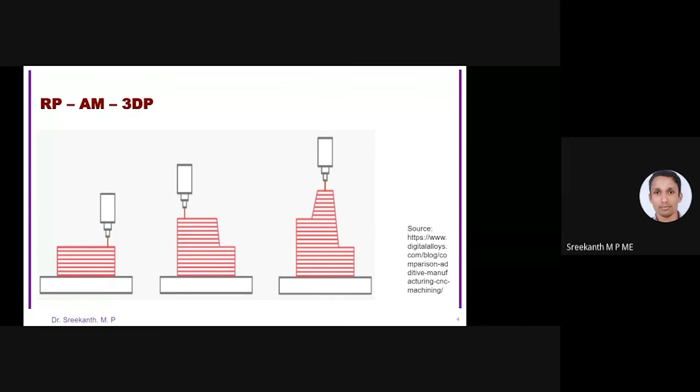This is the basic idea of additive manufacturing. You are depositing a layer of material over a table, then adding another layer over the other. You can make a prototype, or nowadays even a final end-use product. This is a way of manufacturing the product layer by layer. The layer thickness may vary depending on which technology or machine you are using.

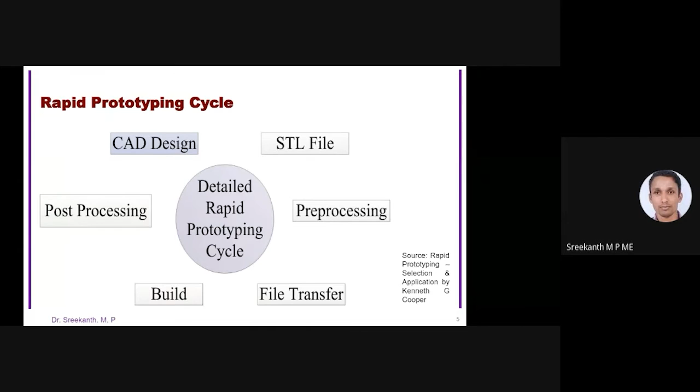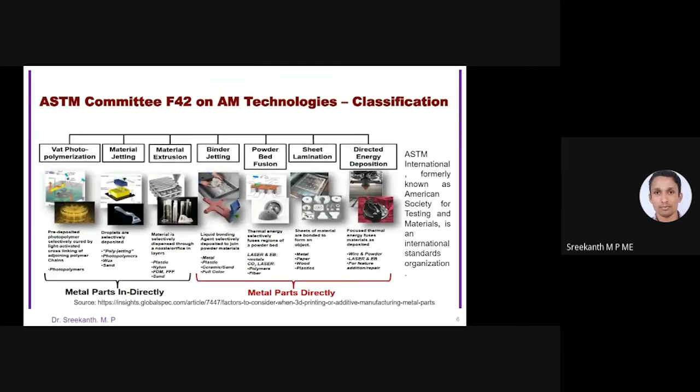I actually worked with FDM, fused deposition modeling, as well as polyjet technology. FDM, fused deposition modeling, is a solid-based technology.

The material in its initial form is in a wire form, and that wire will come through a nozzle into a heated chamber. At that time this material will become semi-solid, like our toothpaste for example. If you press at the back end, it will paste wherever we are projecting or directing it. So it is similar to that.

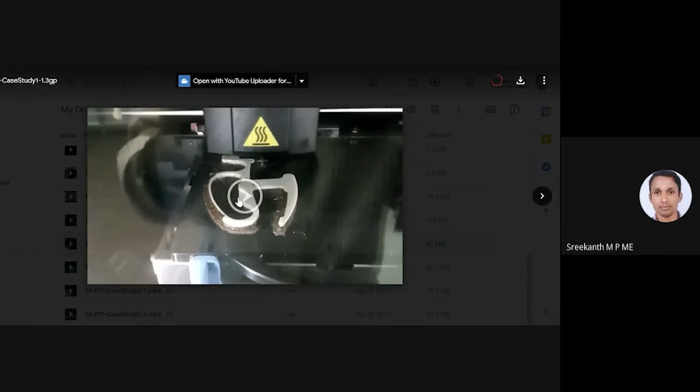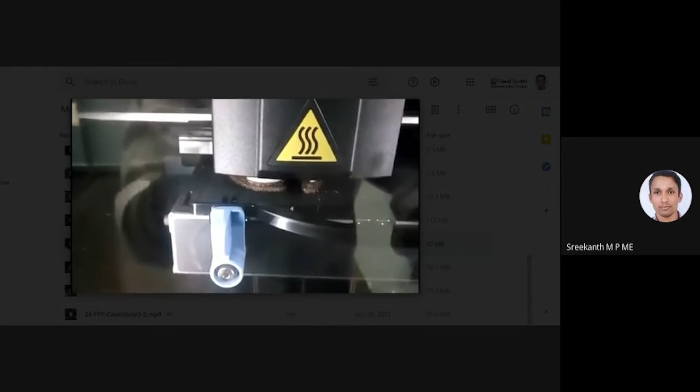So this is the table, and this is the nozzle, and the material will come from the bottom to the top. You can see this is the support material. This is actually ABS material, acrylonitrile butadiene styrene, and the support material is the same material but in a different composition - a chemically soluble material.

After finishing this operation, you take it out and deposit it in hot water around 75 degrees Celsius, with some chemical that will be supplied by Stratasys itself. You put this material into that, and this brown color support material will be dissolved in it. It's soluble, so it gets removed by dissolving.

There are also other support structures called breakaway support structures, which you have to remove using hammers or maybe a knife. So at that time, if you are careless, this process will actually damage the model material itself. There is a possibility for that.

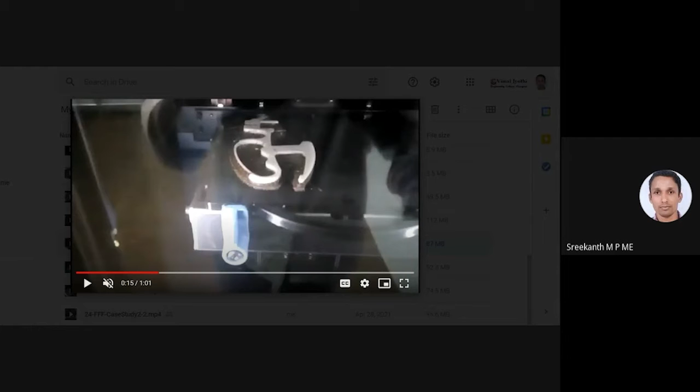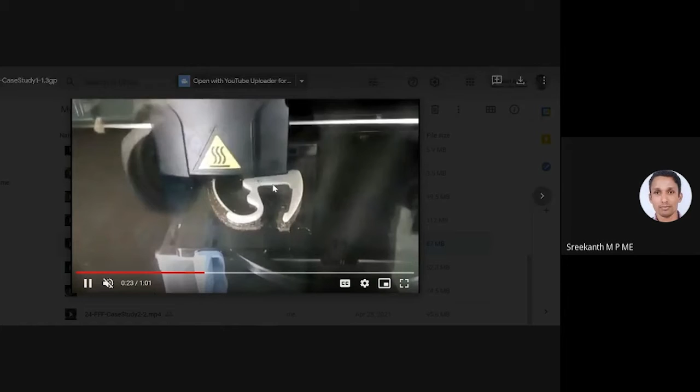That's why they invented this type of chemically soluble or hot water soluble support structures. So that is cleaning the nozzle tip, and after that it will deposit the material again.

You can see here, this part is actually not - there is a slight gap here. So that is not started till now.

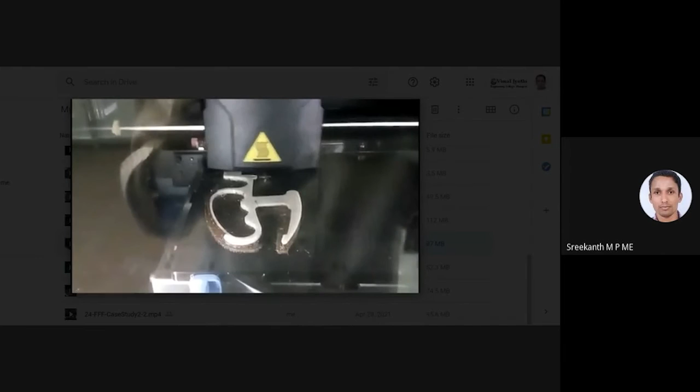In this way, this operation will be done by the machine - meaning the machine will choose where it has to deposit the material first. That depends on how that process is actually happening.

I already told you about pre-processing, right? Pre-processing will be something like this. So normally in the software, you can choose that.

So this will be the build volume. Normally this is called the build volume, and it depends on the machine. The build volume will depend on the machine - it may be 250 by 250 by 120 or something like that.

So if your model is big, you have to scale it down and fit it in between. If the material is beyond this size, obviously you can't print that, so you have to make a scaled version.

So this is what normally happens in the pre-processing stage, and obviously it will depend on the software you are using, but similar operations will be there.

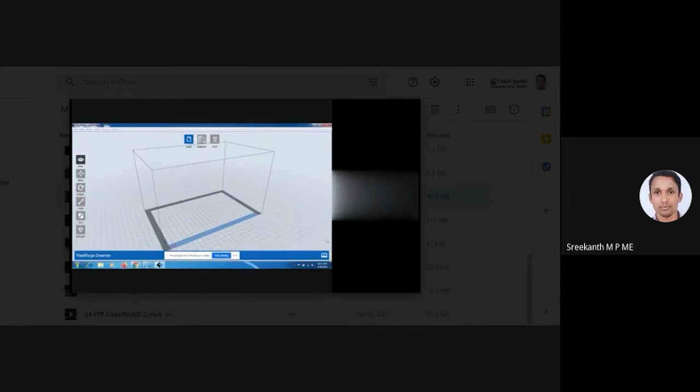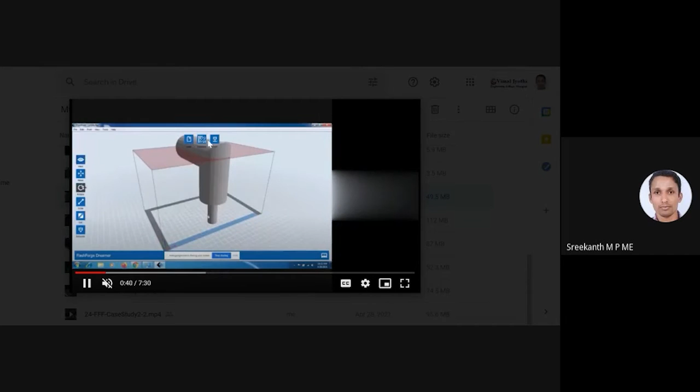You can bring the STL file from your computer. The reason it shows that error message is because it's bigger than the build volume - beyond the build volume for that particular machine. That's why it shows an error message.

So you can set the position as well - this is called orienting. In any way you can orient the product.

If you orient it this way, one main problem is the staircasing effect. If it's a cylindrical object, a staircasing effect will appear, so you have to reduce it as much as possible - meaning the edge will not be very smooth. If you're concentrating on a smooth object or extreme surface finish, it's better to use another orientation to avoid that staircasing effect.

Another point is the size of the object - the height. If you orient it this way, just think the height is till this point. At that time, another problem for FDM and similar additive manufacturing machines is reduced strength in the Z direction. That can also be reduced by orienting it differently.

But you have to create your objectives - meaning whether you need only a surface, just to show how the object will look like.

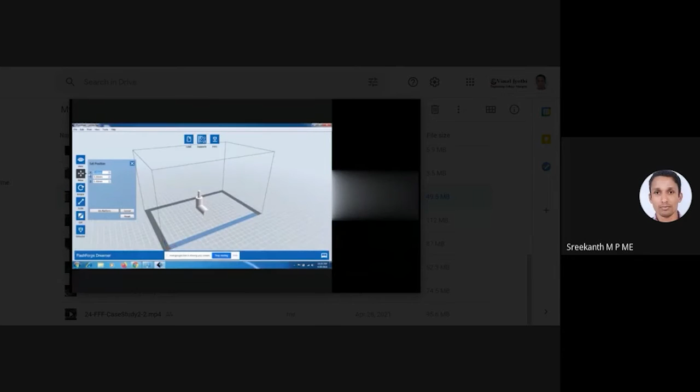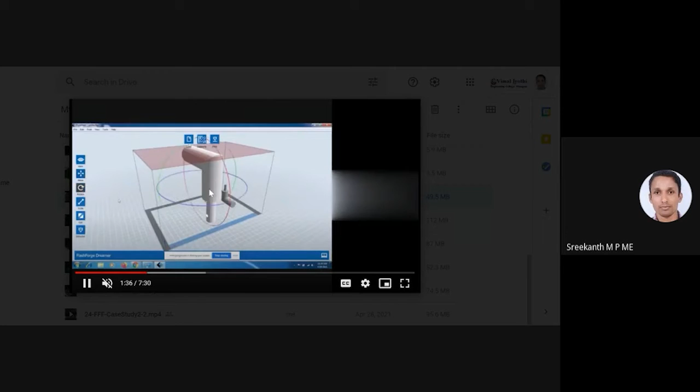So you can position it. This is actually scale down - you reduce the size of the object, then you position that in the extreme right position of the table. Then you can bring the other objects. If you just need to make the prototype, and you need say 4 objects to be printed in this particular run, you can bring all 4 objects and scale them down just to see how it looks like.

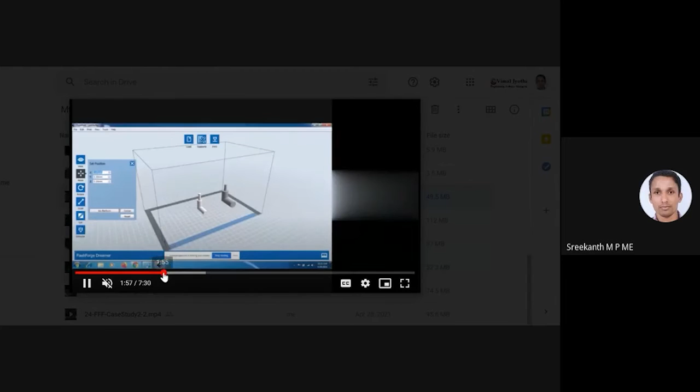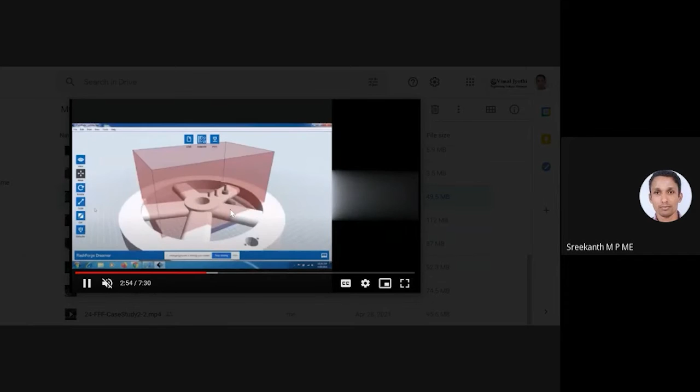You can position it accordingly, then start the process. So all these 3 objects came there. Now we have a wheel, a hand wheel, which is very big size, so we again reduce that and bring it there. You can position it accordingly. So scaling, orientation, positioning, everything can be done in the software itself - this will be the position.

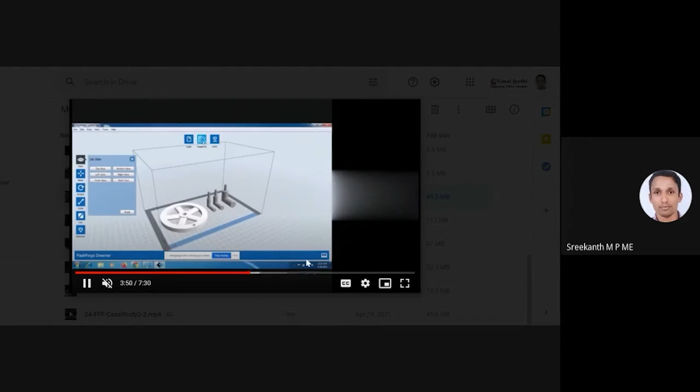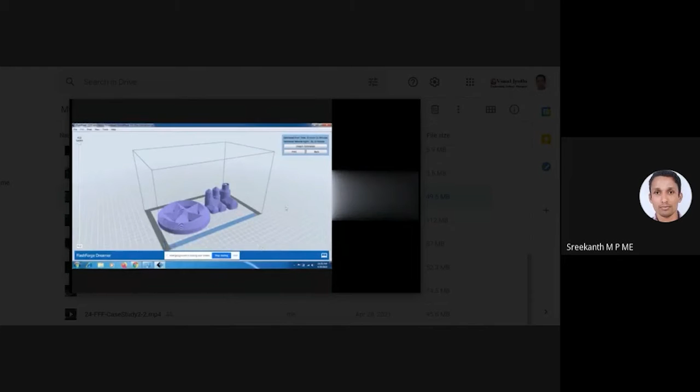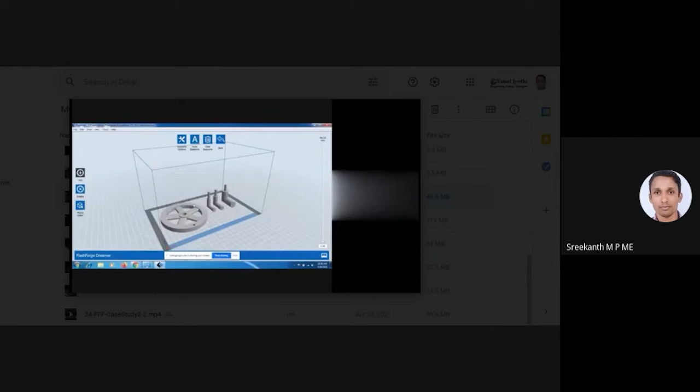After completing all these operations, you can go for printing. It will create the support structure also - you can generate the support structures. Normally every 3D printing or additive manufacturing machine will lay 5 to 10 layers, depending on the machine or technology, of support material below the object. When you remove the products from the table using a knife or chisel type object, it shouldn't damage our product. So we deposit around 5 to 10 layers, sometimes more, of support structures below the object, so that you can remove it easily without damaging your product.

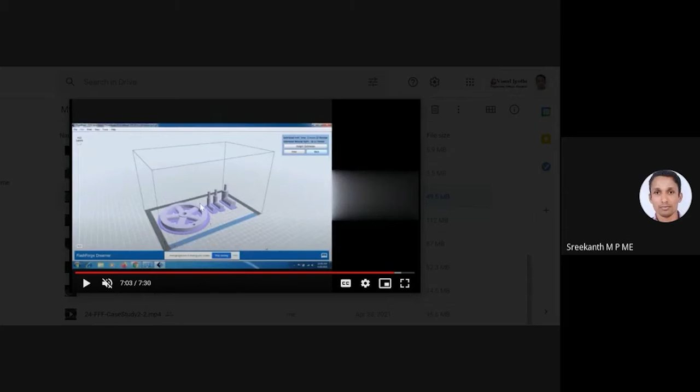This is the way we normally create the support structures, as well as handle the positioning and orientation of objects. You can see these are the actual support structures we generated, below the object. Because there are no much extended surfaces or extended parts in this object, only the bottom support structures are enough to complete this particular product. This is the way we normally do that.

Hope you have a small idea about how it is actually working in this software. Obviously with changes in machine as well as software, slight variations will be there in the operation, but normally we do this orientation, generating support structures, scaling, positioning, etc. in a similar fashion, in a similar manner. So that is about this FDM or FFF.

Why I call this FFF is because FDM is the term for fused deposition modeling - this term is actually used by Stratasys. Other manufacturers use FFF, which is called fused filament fabrication. The technology is the same, there is no difference, but Stratasys patented this word, so others use FFF, fused filament fabrication.

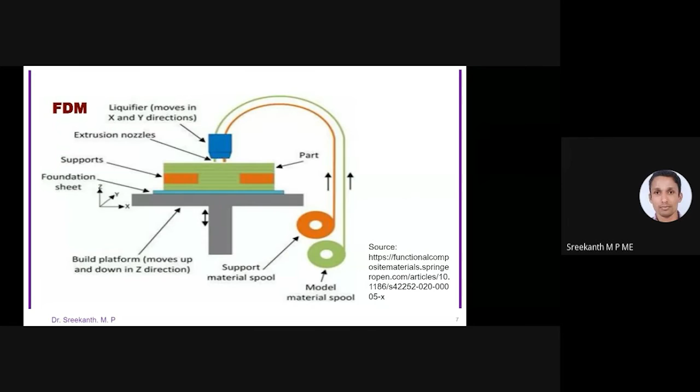So now another machine I worked with is the polyjet process, polyjet technology. This is actually a material jetting process. You can see that this is a nozzle.

Okay, from this, can you see this cursor? Can you please tell me? So whatever I am showing here, is the cursor visible?

Yes, okay, thank you. So because I can point at it easily.

So this is actually that nozzle. Normally that liquid material will be in a container, both support as well as model material. I worked with an Objet 260 Connex machine. There will be two compartments for materials: two model materials as well as two support materials can be inserted together in that particular machine. We can insert two different materials for the model, meaning the model material can be two different materials together.

This is an Objet 260 Connex, also a Stratasys product. They say that if you mix these two materials, there are different patented materials: Vero White, Vero Blue, Tango Plus, Tango Black, etc. This is Tango Plus. The Tango family is a rubber-like material, and the Vero family is a rigid material.

You can insert Vero White as well as Tango Plus together at the same time into your machine, and print by mixing these two materials, say 60% Vero White and 40% Tango Plus. That is possible in PolyJet, in the Objet 260 Connex series of machines. The specialty is you can change this composition, maybe 60-40 or 70-30, etc., so the rigidity and flexibility will be according to your selection.

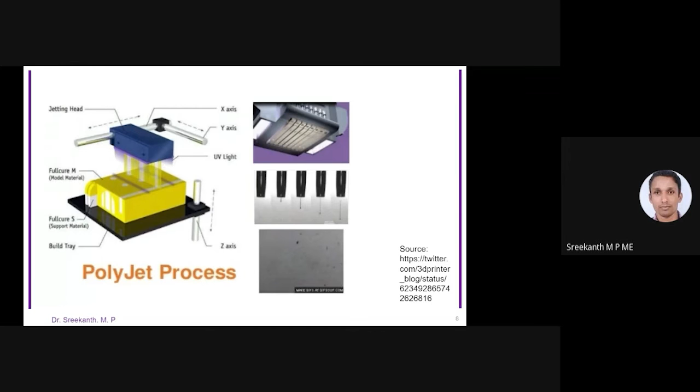That was possible in this type of machine, but in FDM, which is what I worked with, that is not possible. So you can see some of the application areas of additive manufacturing in the construction field.

This is in Dubai and this is in China, and for medical applications like cranioplasty as well as lower jaw implantation. This is actually made by GE, General Electric, for one of their aeronautical engines. And this is a bionic eye, which is still under development, not fully developed, it is under process.

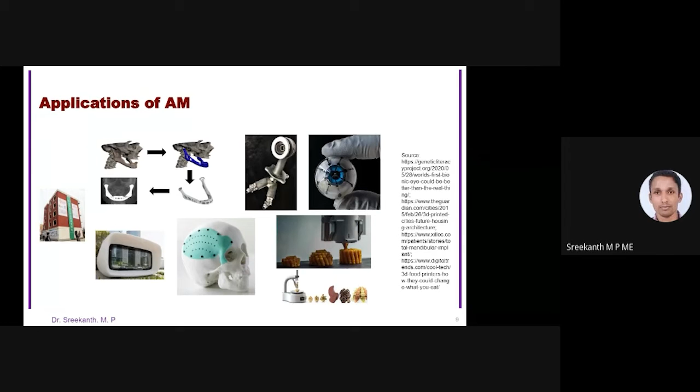And in the food industry, you can print customized chocolates as well as cakes using this, meaning instead of normal plastic material like Vero White, Vero Blue, or ABS, you use a food material, a cake or chocolate material, and paste it through this. The specialty is, by using CAD data, you can make a customized cake or chocolate for one particular person. That was the idea behind it.

The main advantages are: it's a fast process because it reduces time to market. During the design process, starting from recognition of need to the marketing stage, you can incorporate this prototyping stage at different points, creating prototypes in different stages. If you use conventional processes to make prototypes, that will be more time consuming, but comparing to that, additive manufacturing is a fast process.

Another advantage is less wastage of material, because you are adding material, not subtracting anything. In subtractive manufacturing like lathe, milling, shaping, etc., you are removing a lot of material to get your final product.

Here, wastage of material is less, because you are only removing the support material. The model material that you are creating is actually added one layer over the other. The main advantage of additive manufacturing is customization.

Why? Because we know that mass production actually started with the idea of one size fits all product, meaning everybody will use the same product, same size, same shape. But if you want to create a customized product, that's different.

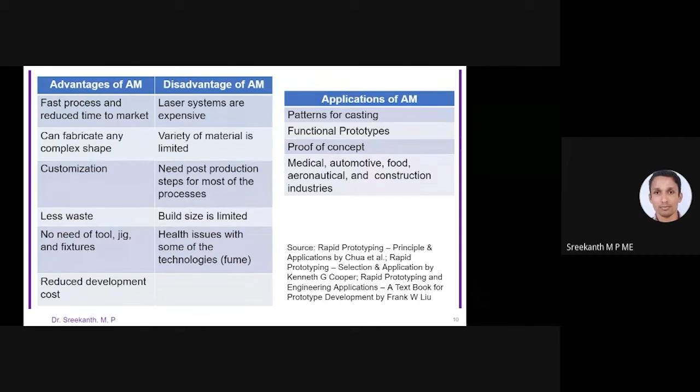That means you can show your design to the management or manufacturing team for further feedback, and you can redesign it.

When considering the additive manufacturing industry as a whole, the Wohlers Report is one of the authentic reports, run by Terry Wohlers. They predict around 7.5% expansion for this industry by 2020, and expect it to grow further. Also, due to the pandemic there were some hindrances.

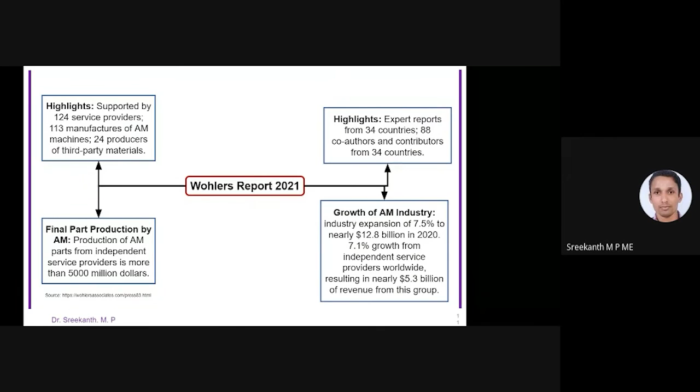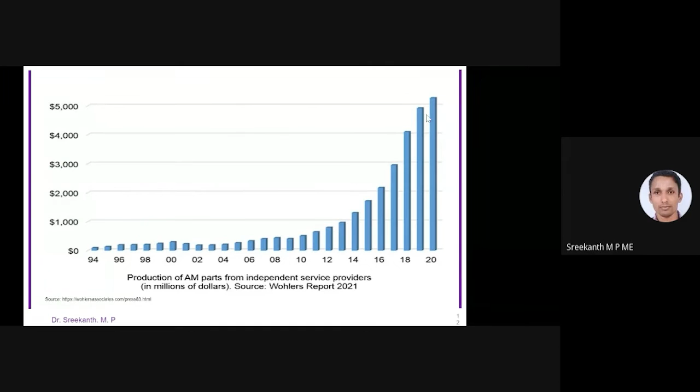Apart from industries like sanitizers, masks, and vaccines, almost every manufacturing industry was badly hit by this pandemic. But additive manufacturing is still increasing, though production and development slightly reduced due to the pandemic. You can see the production of AM parts from 1994 to 2020 continuously increasing, especially after 2012. In 2002 there was a slight decreasing tendency, but after 2012 the growth is tremendous.

So now coming to my case studies, I will present my research experiences.

Before that, you should know what customization and ergonomics mean. I hope you've heard these words. Customization is the action of modifying something to suit a particular individual or task, or maybe a group of individuals. So customization may not be for an individual customer, but sometimes for a group of customers.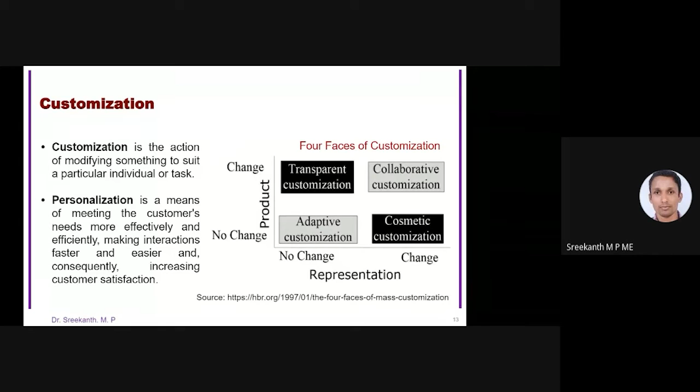This is a very simple example. Personalization is normally individual customization, meaning you are designing for an individual customer, a particular customer, not for a group of customers. There are different types of customization: transparent, collaborative, cosmetic, adaptive. I'm not going much into that, we will come to our research part. Okay, so modularization is there.

When you are going to customize a product, obviously you need to get some data or information from your customer, so that only you can design according to their needs. So these are some of the customer inputs you can collect.

One is functional requirements, how the product should work. If you take the example of a car, you know its main function: it should run and carry passengers. So that type of functional requirement you can collect from customers.

If the customer is a common man, they may not be very interested in functional requirements, but more interested in emotional as well as aesthetic requirements. These are two difficult terms to define, because emotional requirements are very difficult to quantify, and so is aesthetic.

But aesthetic, in some way or other, you can handle, because one customer may think a red color car is a better option, while for another customer it may be a white colored car. Those things can be incorporated, since painting a car red or white isn't a big deal for us. But emotional requirements are very difficult to quantify - that is actually a quality aspect.

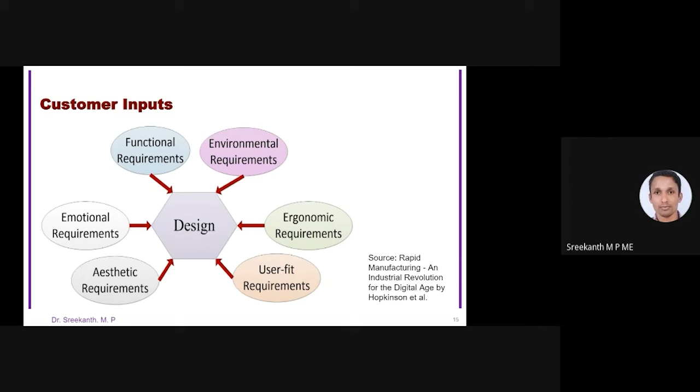So you can do some things ergonomically, and design some objects ergonomically to suit the customer. Next is user fit requirements, which is along with customization. Ergonomics and customization are two sides of a coin, so standalone with customization only, it will not be good. You can merge or combine ergonomic factors with customization factors together and do the design, so that will be better for you.

So you can see here, sitting and working on a computer—these are the ergonomic factors. You have to think about the height, sitting height, as well as the width of the body, etc. You can see this particular handle designed according to the shape of the hand, so it will fit this hand very perfectly, making it easy for him to use that particular product. So this is the basic idea about ergonomics as well as customization.

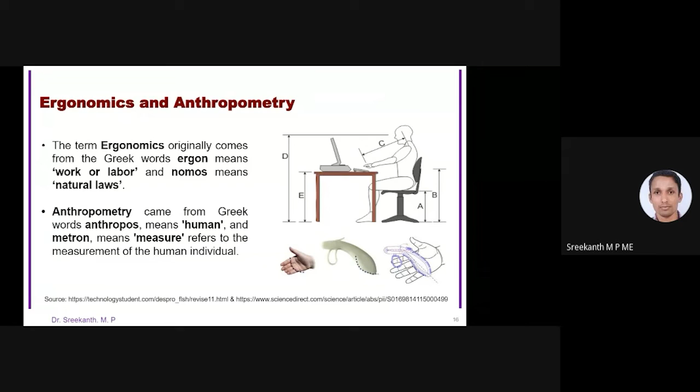My topic, I hope you remember, is user involved product development. So in everything, if it is possible to bring the customer into every stage of your design process, that will be better for you, and you can produce a better product for those customers. So try to involve the customers in your design stage, at every possible stage—that's the idea behind my research.

When I started my research, my guide told me, Sreekanth, our hand size is actually different, right? Did you ever come across this? Think about this—our hand size is very different. Even if you are from the same ethnicity, like South India or North India, or even within Kannur, Kerala, still our hand size and body dimensions are very different.

So collecting these body dimensions is called anthropometry. Anthropometry is related to anthropology, which you may have heard of—that is studying humans, Neanderthal, Homo sapiens, etc. But anthropometry, the 'metry' part, is actually measurement. So this is measuring the body size of a particular customer and designing the product for that customer.

Depending on the product, these body dimensions will be different. If you are designing a handle, you need to collect hand dimensions, not body dimensions like sitting height, etc. But if you're designing a chair, you need to measure the sitting height as well as the width of your body. So depending on the product you are designing, you need to collect the anthropometric dimensions accordingly—based on the product, you have to collect the right dimensions.

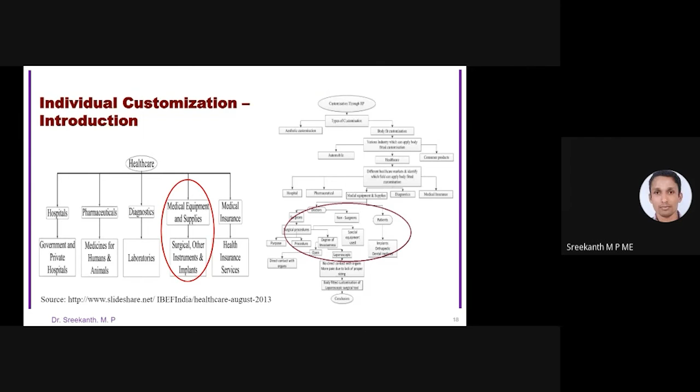And especially in laparoscopic surgery versus open surgery - obviously when you are doing open surgery, you open the body part and touch the organs directly. The surgeons will touch the organs directly, and there is not much problem with that.

But if it is laparoscopic surgery, or minimally invasive surgery, or keyhole surgery, there is a problem - the surgeons are actually inserting tools by creating a small hole in the body, inserting a camera, light, and other tools inside the body, and projecting that surgical area to a monitor. So when the surgeon is moving that tool to the right side, there is a chance that inside the body the tool is moving in the other direction, or maybe the same direction. So he should be conscious about that.

Because of this consciousness, their prolonged surgical time actually leads them to a discomfortable stage, and they get pain throughout the neck, arm, through to the hand. And it leads to surgical errors - meaning because of the surgery you are creating some injury to the patient, or ultimately that patient needs to stay in the hospital for more days, followed by some other surgeries also.

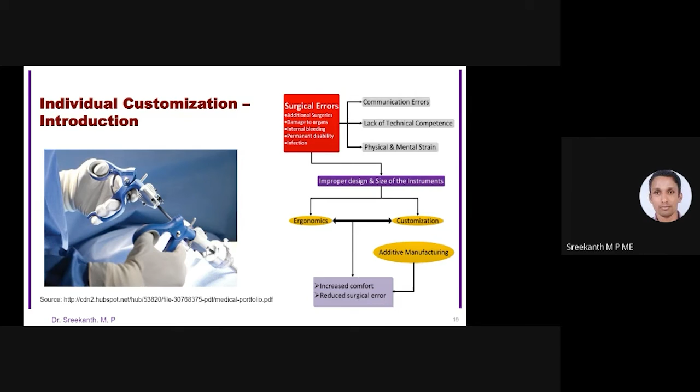So that is what we thought about - if we are designing a hand tool for that particular surgeon with his particular hand dimensions, we will incorporate some ergonomic factors in that. So obviously that comfort level will be increased for that particular surgeon, and we can reduce these surgical errors. That's the idea behind our work.

So you can see that this is open surgery and this is laparoscopic surgery. Based on that, what I did is I went through a survey among the surgeons in and around Coimbatore, as well as through some email.

So I collected some emails from surgeons and sent my wish and my objective related to my research. Some of them replied, some didn't, obviously. And I met some of the surgeons personally, so I collected some data. Based on that, I concluded that they are having a problem in the hand, especially with forceps.

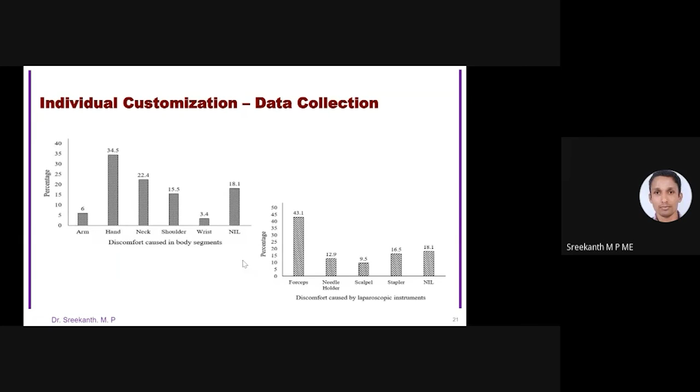Based on that research, based on that survey, I decided that based on hand size, we will design or redesign a forceps handle. So these are the dimensions I collected - total hand length, palm length, palm width, as well as the circumference of the fingers.

Sometimes we may not need to incorporate all these dimensions, but as it is the hand, I started with collecting the data. At that time, I hadn't yet selected which forceps I would actually work with, but we didn't have a design or existing design for that - we didn't get that.

We don't know the exact dimensions we need to incorporate. As this is PhD research, we can't wait for something for a long time, so we have to do some things in parallel. We know the main dimensions for a hand, so what I thought is we will collect the dimensions first. When we got the existing product, we analyzed it and identified the critical dimensions we need to incorporate, then we redesign it. That's the idea behind it.

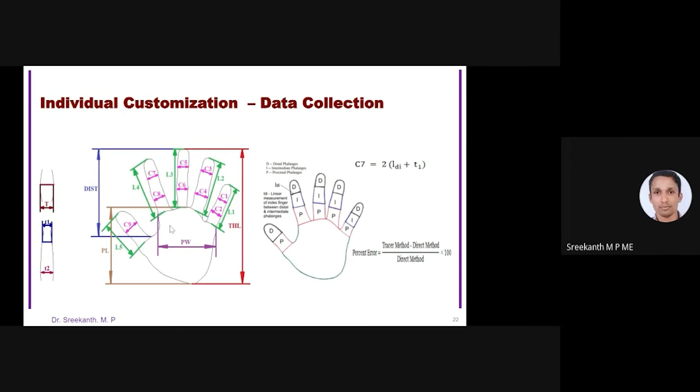So we started collecting the data and we collected around 280 samples. I got help from our students as well as my fellow researchers. I collected data mainly in and around Coimbatore region, because that's more comfortable for me to reach these subjects.

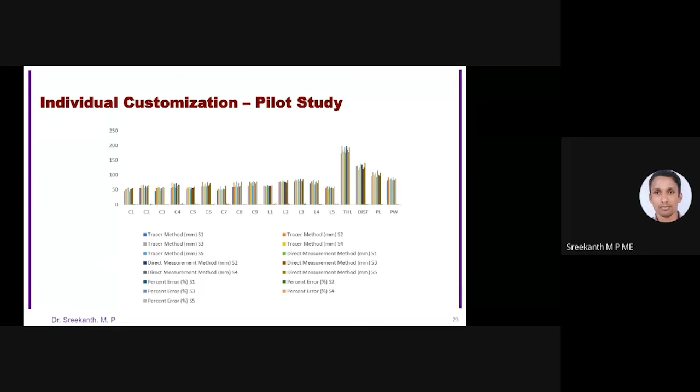So these are the descriptive data I collected, and I conducted a pilot study to check whether the dimensions are actually within the limit. Based on that, this is how we are going to orient it. That study I did.

Last one, we got an existing forceps design from Hospins, a surgical tool manufacturing company based in Coimbatore itself. Fortunately we got one design from them, so we started analyzing it.

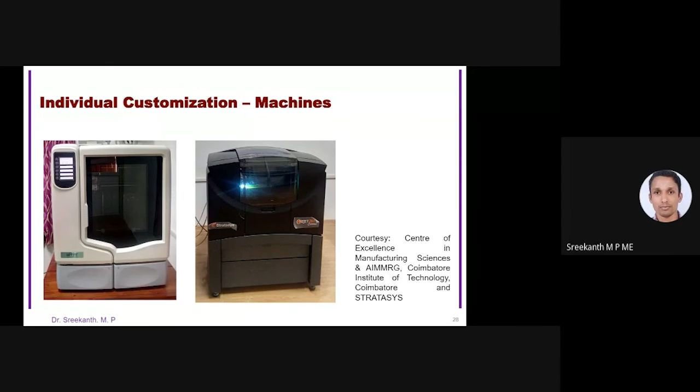These are the two machines we used. We printed accordingly, and we prototyped 3 designs.

The first preliminary design, we just went through to see how it will look and what the problems would be. One problem was that we used a shell structure inside, so there was void space, making the strength very low - we had to increase the strength. Also, the height was slightly more, and surgeons were not able to reach the thumb properly, so we needed to reduce that dimension.

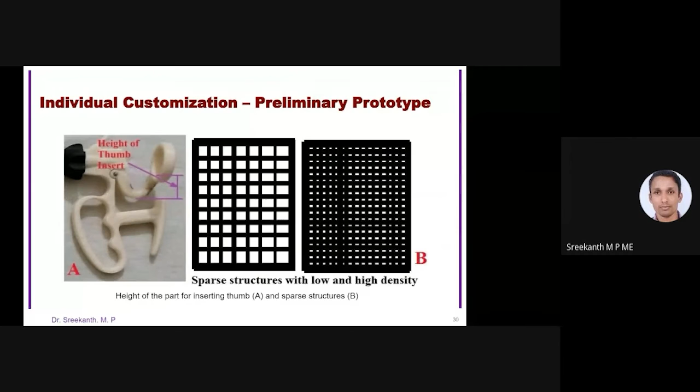So according to the dimensions, another thing we did was incorporate a user comfort module in this modified design. You see there was nothing like that in the existing design, but here we incorporated it for support, meaning you can increase the contact area. I will show you how it actually increases the contact area.

But at that time, for the first design, we didn't consider the palm width of our hand, so it was actually piercing. If it's hitting inside your hand for a long time, there will be some pain, so we had to increase the length according to our palm length. This was the basic analysis based on the first design.

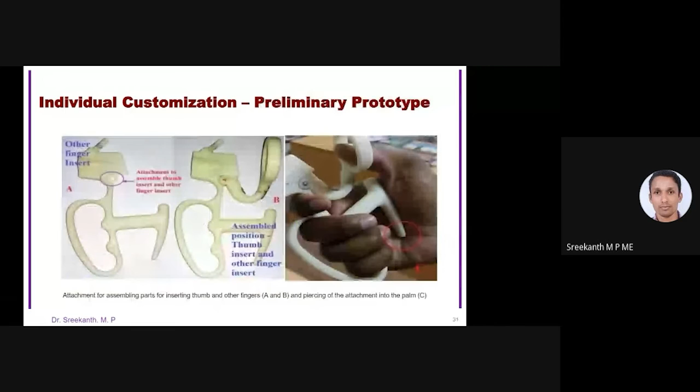So we redesigned it - you can see we increased the length of that user comfort module. This is based on minimum, median, and maximum dimensions of the hand data we collected: age, height, weight, BMI, shirt size, circumferences, total hand length, distance, palm length, and palm width. Based on this, we designed 3 designs - for minimum dimensions, maximum dimensions, and median dimensions.

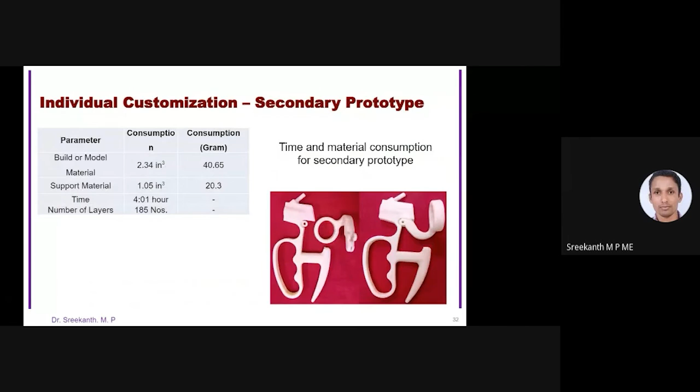But we actually need an individually customized product, right? This is not individually customized - it's designed for one particular group, meaning the group will have minimum hand dimensions. So what we did is have a base model.

Or maybe in your cloud, so you can bring that. If a customer comes to you for a surgical tool handle according to his hand size, what you can do is you already know the critical dimensions, the diameter or circumference of the hands, because the fingers will be there - little finger, middle, ring, and thumb finger. The point finger should be there to operate this part.

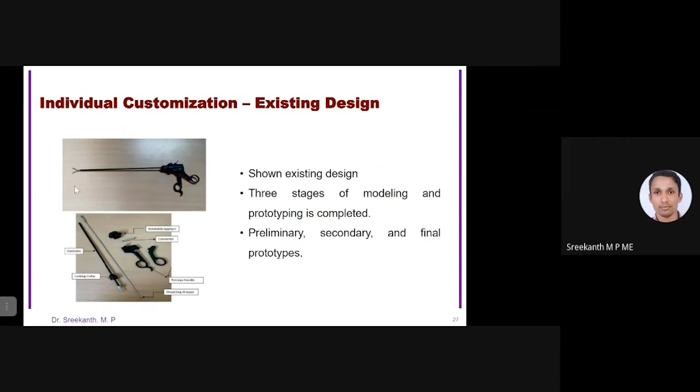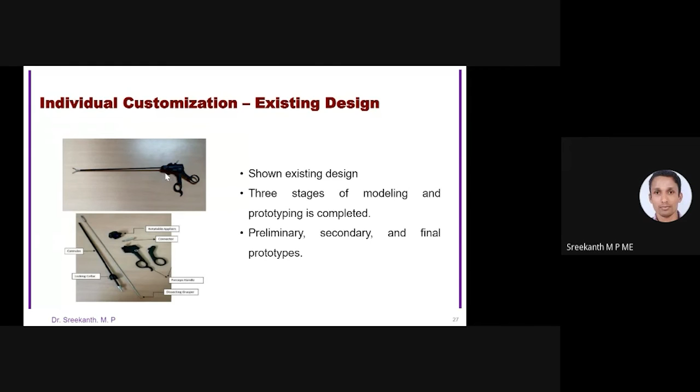This is used for holding the organs inside, so by operating this, it will close and open. Sometimes you may need to rotate this - there is a rotatable applier. You have to rotate it using your point finger, so the point finger should always be outside this part, and by using the thumb and point finger, you can rotate that.

So that particular surgeon comes to you, and you have this base model. If his dimensions are below the maximum dimension of your base model, you can print two rubber inserts according to his hand size, since rubber inserts are also there in your CAD computer environment or virtual world. You can redesign or rearrange the dimensions and directly print them in the machine and insert that. This base product also you can print out, because it's not available physically - only in the virtual environment. So you can print all these things.

It may take around 6 hours - you can see this actually took approximately 4 hours, maybe 6 to 7 hours. So the design and prototyping stage will be long, maybe maximum 1 day, so within 1 day you can send the final product to the customer. This is the printed part, and this is the maximum dimension. For testing and analyzing purposes, we also printed minimum as well as median dimensions.

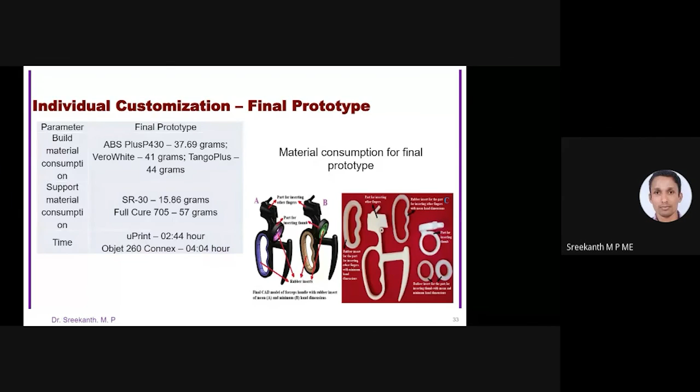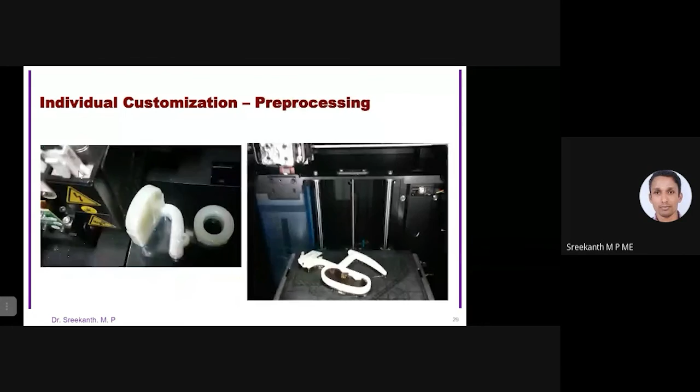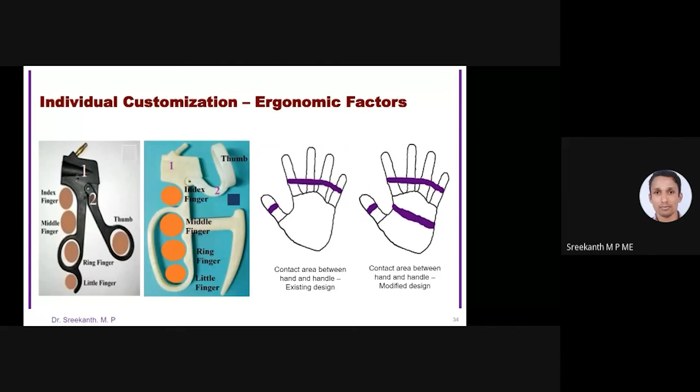You can see that in the existing design, only the contact area is this much, but for the modified design, it is increased because of that user comfort module. Obviously, if you increase the contact area, you can take up the load perfectly, so that will increase the comfort, and the piercing effect is reduced or almost eliminated.

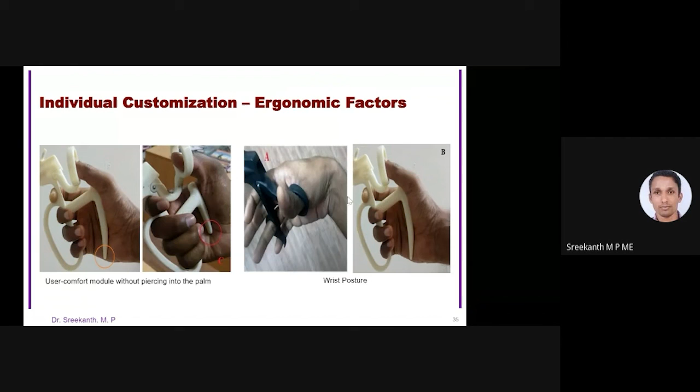Now this is the wrist position - another ergonomic factor we incorporated. In the existing design, this wrist position is actually twisted, but in the modified design it is more in a neutral or straighter position, which will also increase the comfort.

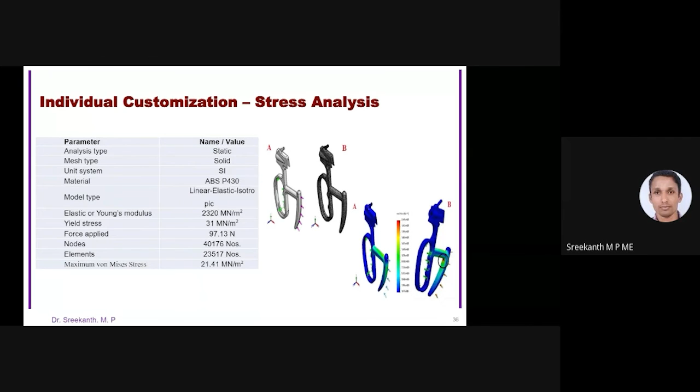So some analysis for the thesis - this was done for a stress analysis, to see how much load is actually taken up. For that we applied 97.13 Newton, which is the normal grip force for Indian males. We found the material is almost okay, but it is not final.

That's just the prototype, because for the final design, if you want to commercialize or market it, you need to do a lot of other things, like taking permission from IMA and similar boards to test that particular tool on a patient. So there's a lot of process there. For completing my PhD, I did up to that point, and by showing the existing as well as modified design to surgeons, I met around 80 surgeons personally and collected data from them.

They are saying functionality is a relative term because it's a prototype, so they can't test that. They aren't able to fully understand how it functions, but they say it involves grip strength, comfort, and wrist posture. They are satisfied with this, but functionality they couldn't tell, because they have to actually operate the tool to know that.

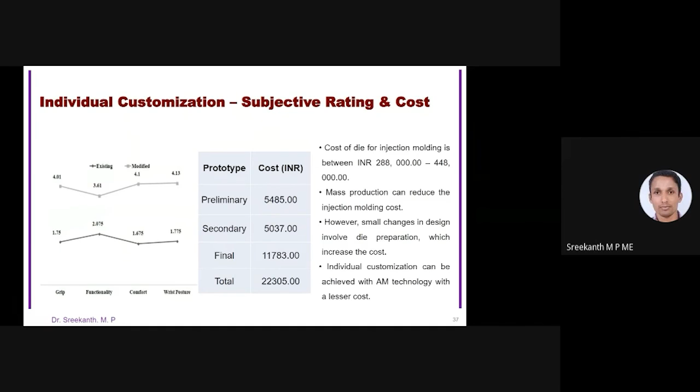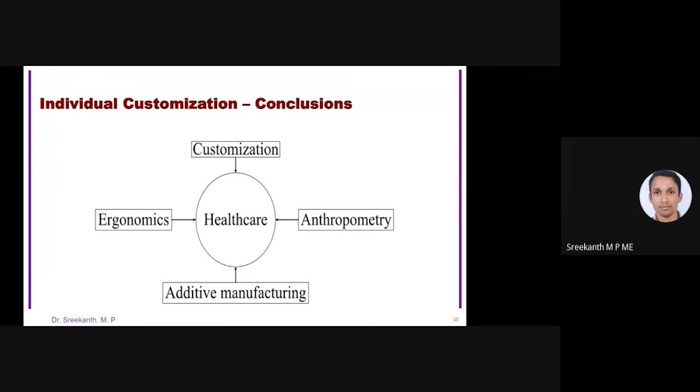So I combined these three areas, customization, ergonomics, and anthropometry, into a healthcare product manufactured through additive manufacturing. That is actually possible.

So case study 2, this is my recent UG project. Due to the pandemic we didn't reach the expected position in this project, but the strategy I told you about in the previous session, we applied here as well, not for a healthcare product but for a handloom.

Handloom industry. We went to a handloom industry nearby. Kannur is famous for handloom industries, there's a legacy for that. We went and talked with them, my students did that since it was their project, and this is a winding machine.

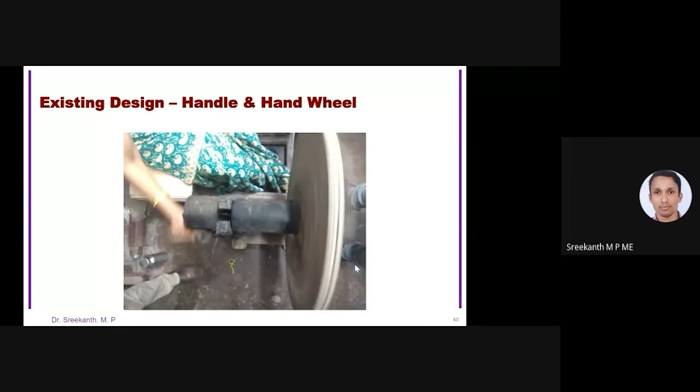This is made of wood. They have to rotate it to wind the string in the machine, and for that they perform this operation. Mostly females use this particular machine, it's a hand machine, and they rotate this part. Because it's held in this position, we needed the grip diameter.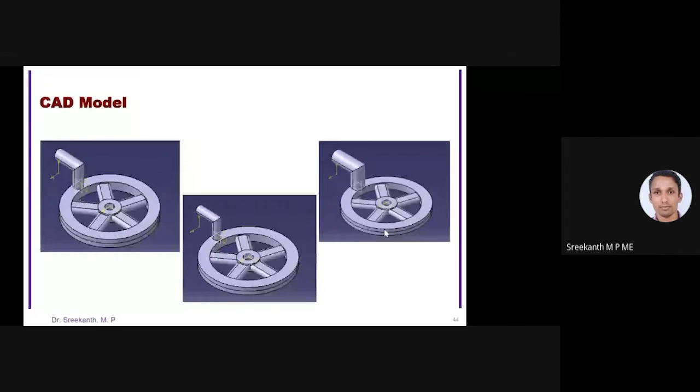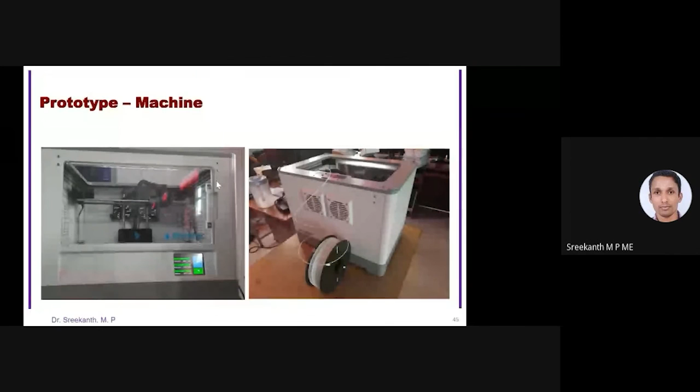As I told you, due to the pandemic we weren't able to go to another college or industry to print these designed objects. But we have a small machine called an FFF machine, the Flash Forge Dreamer, and with that we printed it using PLA material, polylactic acid, which is what I showed you in that video.

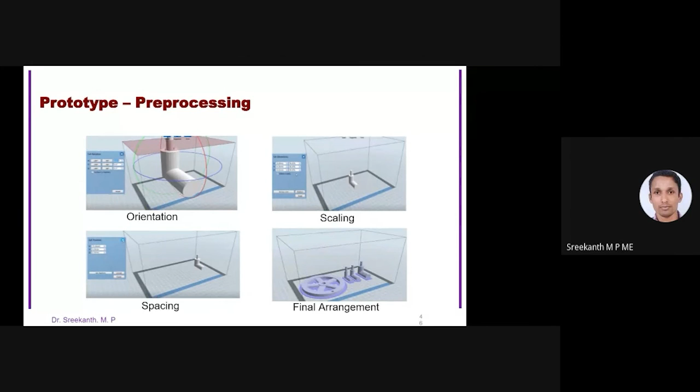It's actually a scale model because the build size is very limited for our available machine, so we did a scaled model for our project purpose. It's not finished in my view, but we printed according to that, and this is the scale model.

We were not able to test this or get feedback from the workers, because we needed to complete it by May, and during April and May things were almost shut down. So we couldn't go there for feedback, and instead we just took the printout.

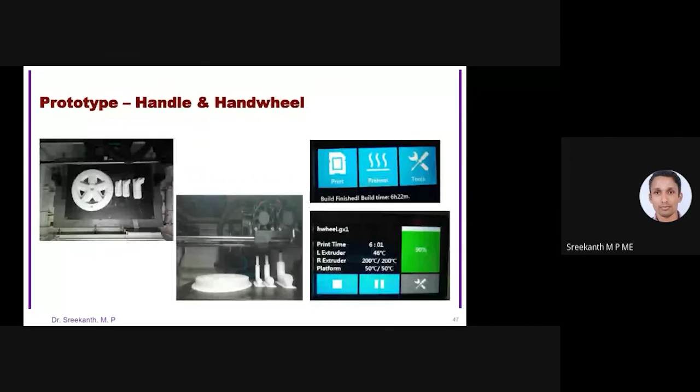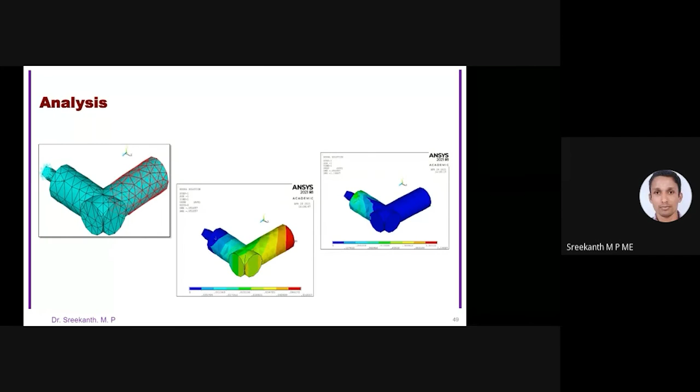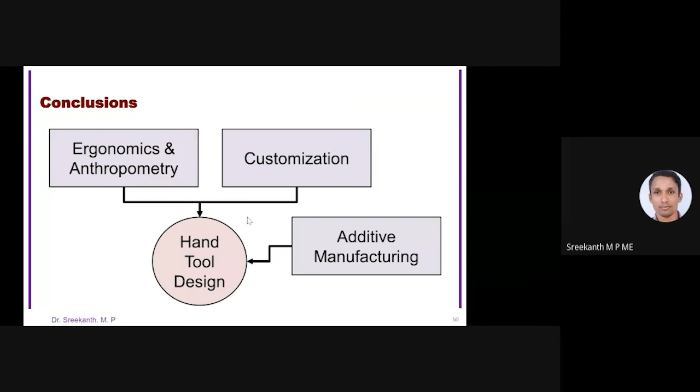But this strategy is actually good, we can incorporate it, though we need to go some more distance to complete the project. We did a small analysis on that, using ANSYS for our project purpose, analyzing the handle again using grip strength. So ergonomics, anthropometry, customization, and additive manufacturing for a hand tool in hand wheels, that is also possible, and that's what we did.

So these are some examples I went through, from my personal experience in a project and research.

This is some work done by other researchers on a hand wheel handle for a wheelchair. They took an impression, another method you can adopt to design a handle. They made an impression of the individual's hand in clay, scanned it using computer tomography or MRI scan data, converted it to a DICOM file, and brought it into CATIA or a similar environment where you can redesign it and print it.

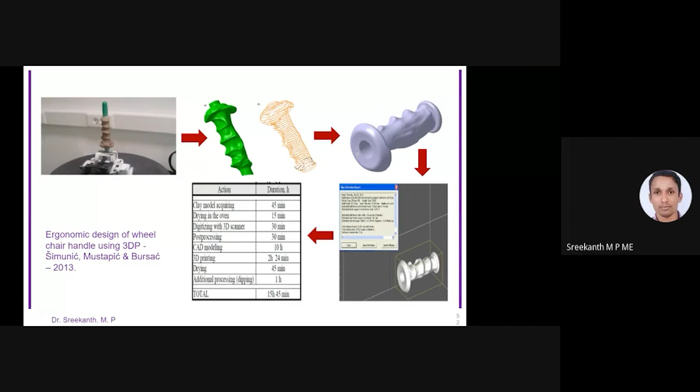You can see that the total process to complete this project or complete that handle is actually 15 hours 45 minutes. That is within 1 day, and even 1 day is enough for completing that project. So in that way, you can think about additive manufacturing for redesigning it with a customized design.

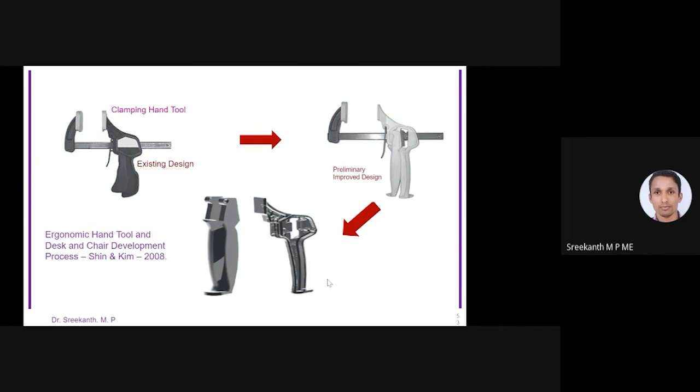So the researchers, Shin and Kim, redesigned it, and according to that, the sharp edges are reduced, the weight is reduced, all those things are incorporated in the final design.

So these are some glimpses or ideas behind how you can incorporate additive manufacturing as well as customized design in hand tools. I've talked about handles, but you can obviously think about other similar or different products and how to incorporate these types of ideas into your customized design.

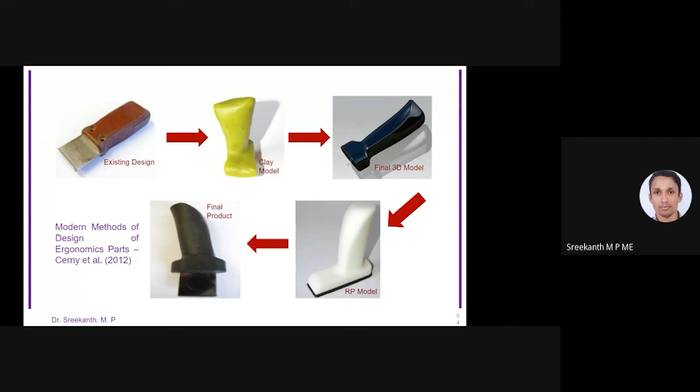So this gives you an idea of how you can collect the anthropometric data, what anthropometric data you have to collect, and what ergonomic parameters you have to incorporate. That's the basic idea of my talk - that's my aim. You can think about a new or entirely different product, and you can think about a customized product using additive manufacturing. So I've talked about only hand tool designs today.

Thanks to my supervisor, Dr. Rajesh Ranganathan - without him it's not possible - and the team, Additive Integrated Manufacturing and Management Research Group at Coimbatore Institute of Technology, and Vimal Jyoti Engineering for that case study too, and my project students. They actually did almost every work, I just guided them. Because I know what I did in my PhD, we thought about incorporating similar ideas into a hand wheel, meaning a handloom industry hand tool.

And Kanjirode weavers, they actually helped me - they allowed us to go inside the industry and talk with the workers, etc. And obviously thanks to all scientists, engineers, and to you also, because they are all working for making this scientific community better.

They're actually growing every day. And obviously the images I used in this presentation are just for informational purposes, because I have to give courtesy to those people who created those images.

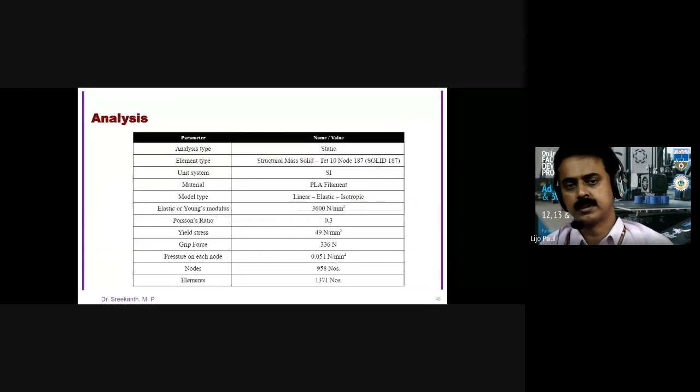Sir, so after 3D printing a material, how can we remove the support material from that properly?

There are different types, especially in FDM technology, where you need to remove the support structures, as well as in Polyjet technology - different technologies use different methods to remove the support material. There are BAS, breakaway support structures, and chemically soluble support structures. In BAS, you actually use chisels or similar objects to remove the material by breaking it.

In chemically soluble support, you're just putting the model material, meaning your product, fully in hot water with a chemical solution, so that it will dissolve. And in Polyjet technology, what I used - the Objet260 Connex - there's a water jet machine that comes along with that particular machine, so you can remove the support material by injecting a water jet on it. The water jet is around 230 bar pressure, if I'm remembering correctly.

That much pressure will be there in that water. It's actually a jet, a high, very intensified jet. So that will remove the material.